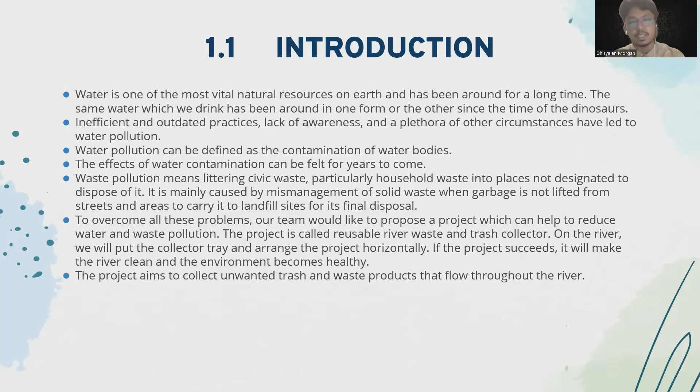Chapter 1, Introduction. Water is one of the most vital natural resources on Earth and has been around the world for a long time. Water pollution can be defined as the contamination of water bodies. Water pollution means littering civic waste, and the contamination of the water can be felt for years, and the effect may come in disease. To overcome all these problems, our team would like to propose a project which can help to reduce water and waste pollution.

Moving on to the research background. Water is the basic need for human beings and any living thing. Earth is covered with 71% of water, and out of that 99.7% is in the ocean, soil, ice caps, and floating in the atmosphere, and only 0.3% is available for human use.

Therefore, an idea was approached to reuse the waste water that flows through the river system. But we face a problem: a lot of solid waste flows into the rivers and blocks the proper flow. Currently, there are manual workers helping to remove the blockage.

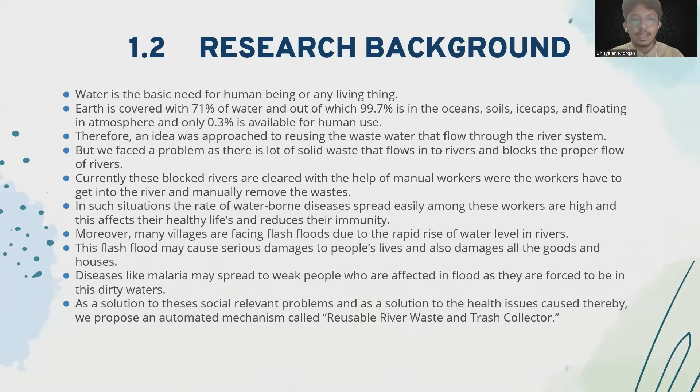Today I'm going to explain the objectives in chapter 1. The first objective is to design the product in a way that mainly suits the purpose of collecting trash that flows in the river, as well as assembling the product with the correct procedure and steps without any obligation.

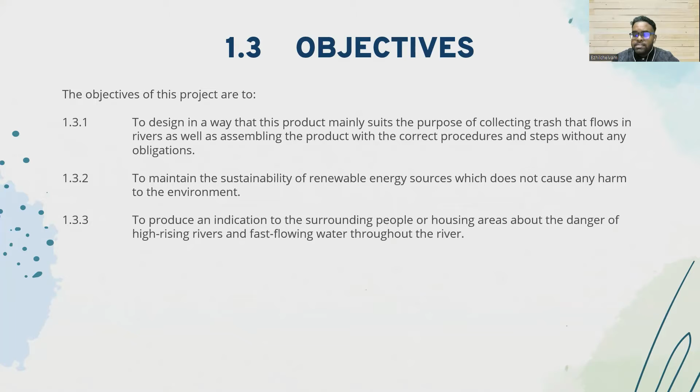The second objective is to maintain the sustainability of renewable energy sources, which does not cause any harm to the environment. The third and final objective is to produce an indication to surrounding people or housing areas about the danger of high rising rivers and fast flowing water throughout the river.

Moving on to the problem statement. The first problem statement is polluted rivers with waste and trash. We can solve this problem using our project, which can collect waste and trash from the river. Hence, the river will be clean.

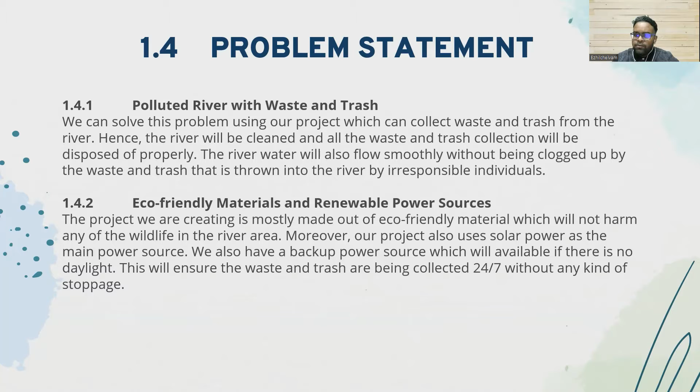The second problem statement is eco-friendly material and renewable power sources. The project we are creating is mostly made out of eco-friendly material, which will not harm any of the wildlife in the river area. Moving on to the third problem statement: cost of the project is high.

The cost of the project we are building is higher because we use mostly eco-friendly materials which are high in quality. And the final problem statement is existing river waste and trash collectors in the market.

The river waste collector already exists in the market. The difference between our project and the existing project in the market is our project can be reused a lot of times and does not have a high maintenance cost.

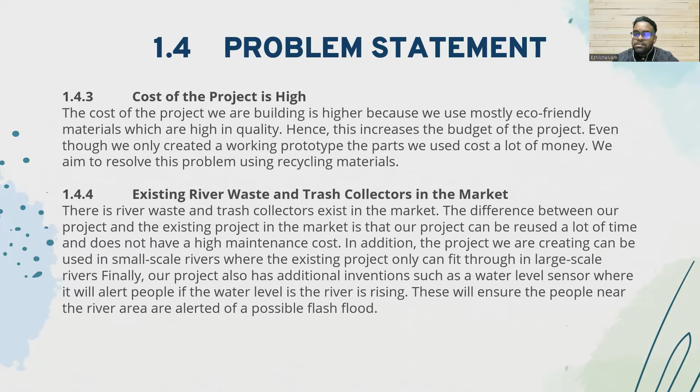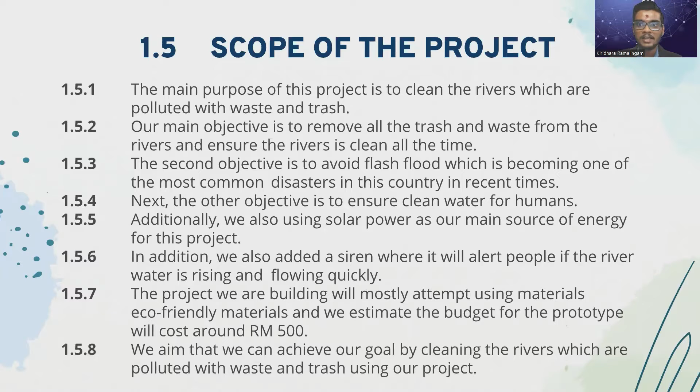The main purpose of this project is to clean the rivers which are polluted with waste and trash. Our main objective is to remove all the trash and waste from the rivers and ensure the river is clean all the time. Next, we are going to look at research question 1.7, which is the significance of research.

This project aims to collect unwanted trash and waste products that flow throughout the river. This product contains a high quality net that filters all kinds of trash, and the collected trash will be automatically thrown into the nearby trash bin, where all the trash will easily slide to the bin when the trash collector is raised at one end.

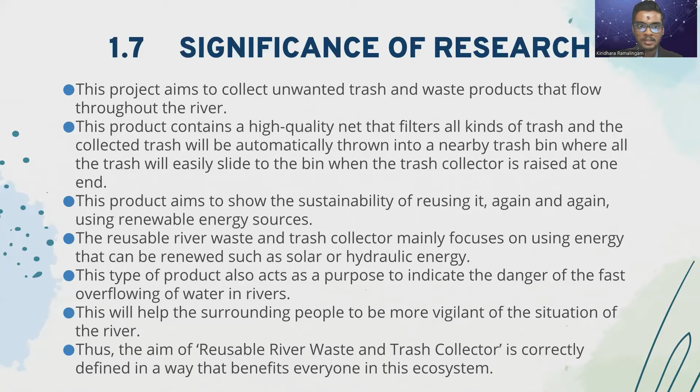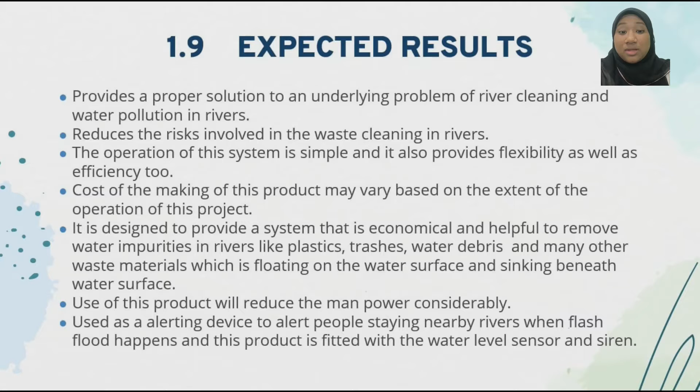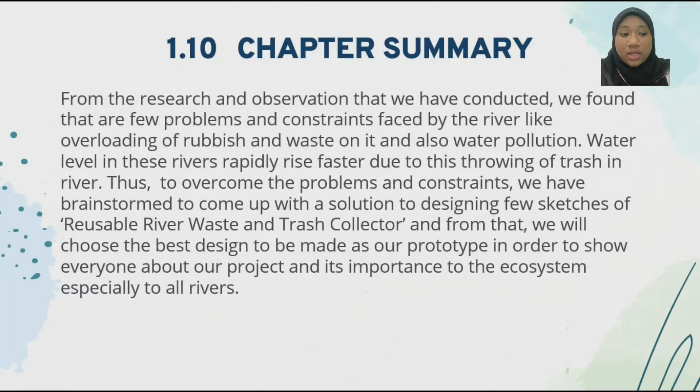Reduce the dangers associated with river garbage cleanup. 1.10 Chapter Summary: based on our study and observations, we discovered that the river has a number of issues and limits, including an overabundance of trash and waste.

Now, let's look at the chapter introduction. After determining the problem statements, objectives, scope, and limitation of the project, a literature review was conducted by group members using books, library materials, and the internet to proceed to the next stage. Moving on, we will look at the concept theory.

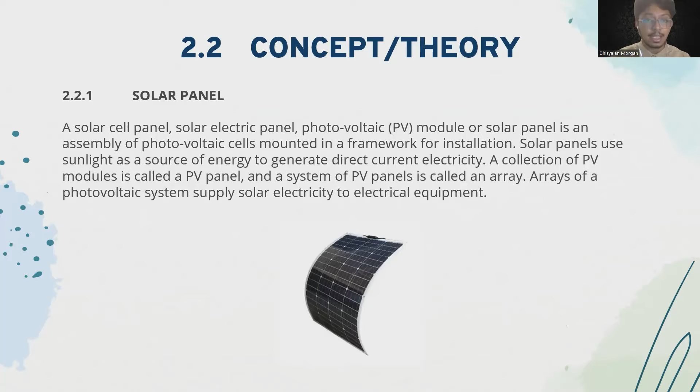First, solar panel. A solar panel is an assembly of photovoltaic cells mounted in a framework for installation.

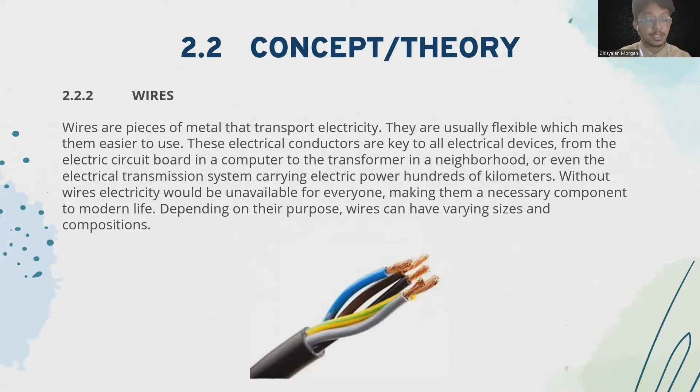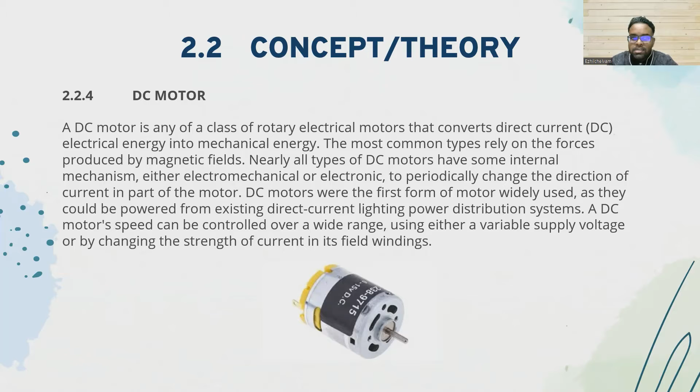Next will be the wires. Wires are pieces of metal that transport electricity. I'm going to talk about concept and theory in chapter 2. First of all, I'm going to talk about DC motor. DC motor is any class of rotary electrical motors that converts direct current electrical energy into mechanical energy.

Glue is a form of thermoplastic adhesive that is commonly sold as solid cylindrical sticks of various diameters, designed to be applied using a hot glue gun.

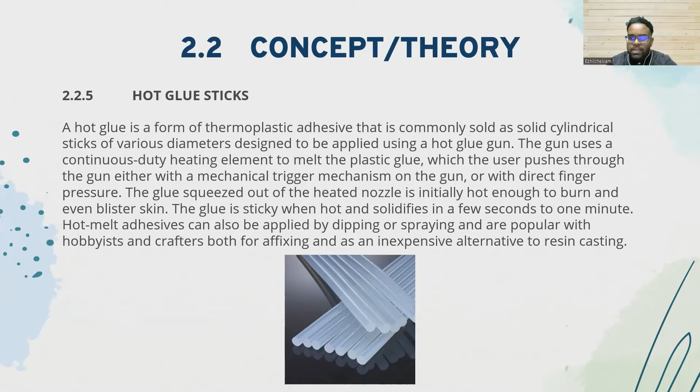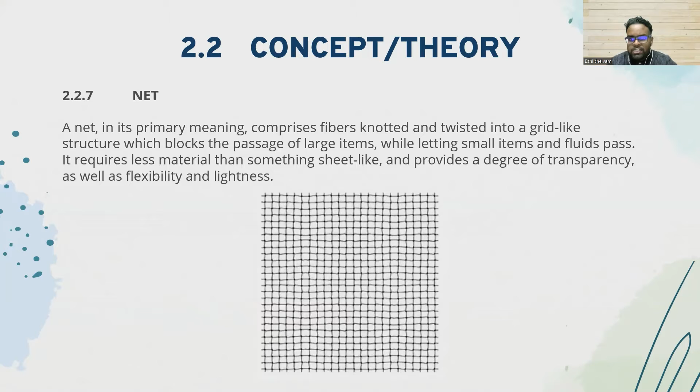Next is a net. In its primary meaning, comprises fibers knotted and twisted into a grid-like structure which block the passage of large items while letting small items and fluid pass.

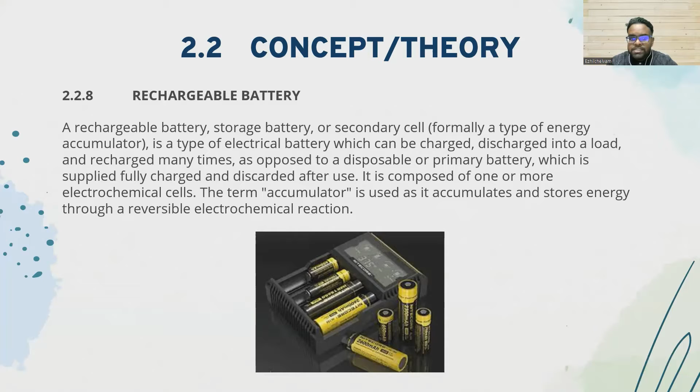And the next one is a rechargeable battery. A rechargeable battery, storage battery, or secondary cell, formally a type of energy accumulator, is a type of electrical battery which can be charged, discharged into a load, and recharged many times, as opposed to a disposable or primary battery which is supplied fully charged and discarded after use.

The next part in concept theory is steel pipes. Steel pipe used as a frame to hold the net tightly.

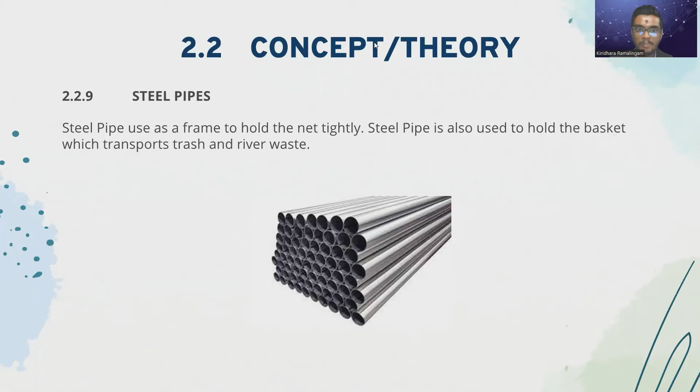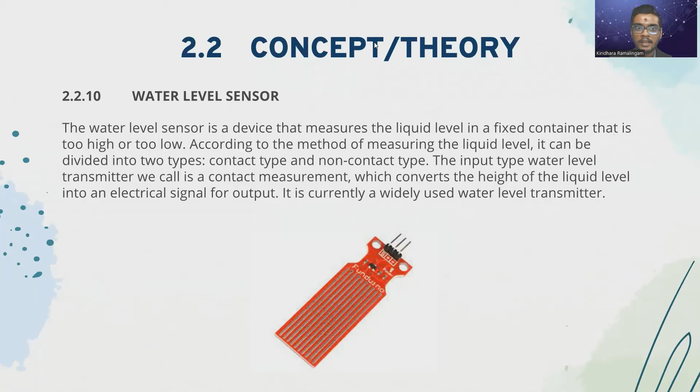Next, we are going to look at the water level sensor. Water level sensor is a device that measures the liquid level in a fixed container that is too high or too low. Siren is a device for emitting a loud wailing sound, especially as a warning or signal, typically consisting of a rotating perforated metal drum through which air or steam is passed under pressure.

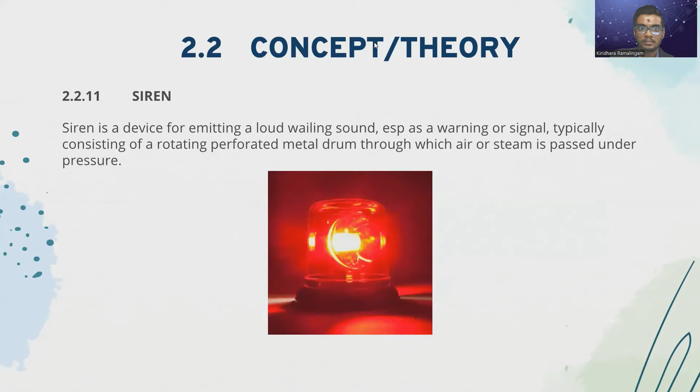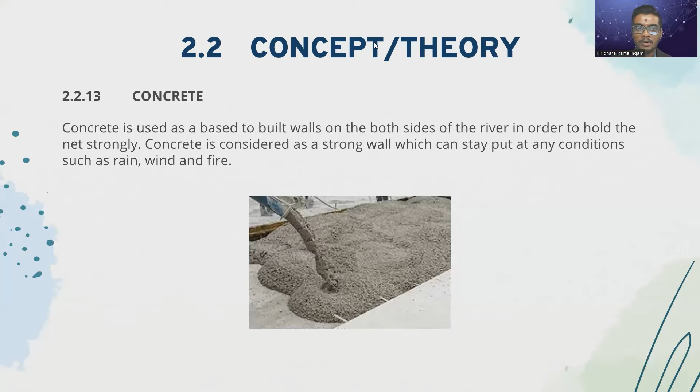Concrete is used as a base to build walls on both sides of the river in order to hold the net strongly. Wire basket used to hold waste and trash.

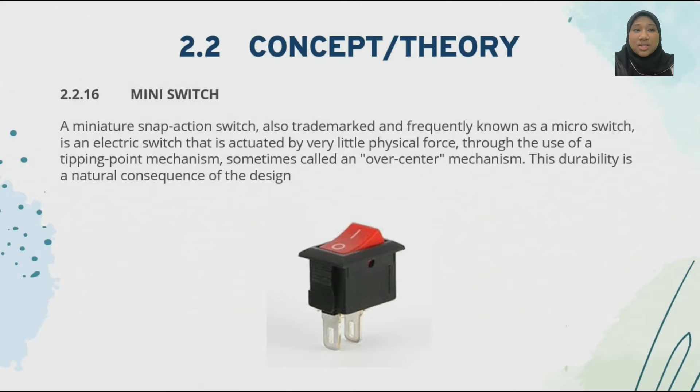Power bank used to provide portable power. Mini switch, an electric switch that is actuated by very little physical force. Belt used as a source of motion.

Previous research. The first vessel deployed in Malaysia back in November 2019. The Interceptor 002 is out of service due to the floods that wreaked havoc in several parts of Malaysia, including Selangor last year.

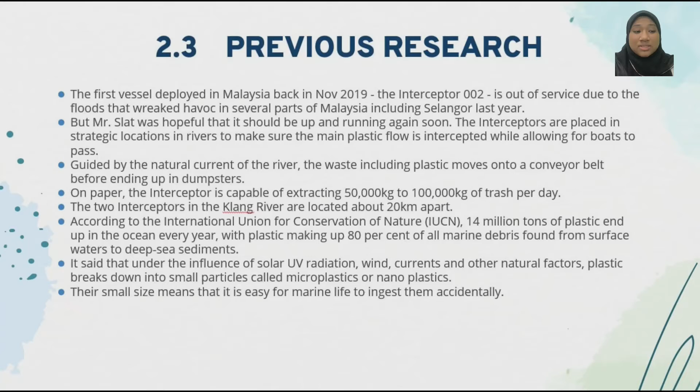Summary. Reusable river waste and trash collector will help to filter rubbish. The solar panel helps to reduce the usage of non-renewable energy.

Moving on to the next chapter, which is chapter 3, methodology. First, let's look at the chapter's introduction.

This chapter will teach us how to collect various forms of data in order to create a reusable river waste and trash collector. This chapter outlines the many stages of research, which primarily contains public opinion polls, questionnaires related to our topic. Moving on to the project design.

Designs are required for the development of the project, reusable river waste and trash collector. This must be completed in order to develop a concept of ideas for the project.

Before designing or making designs for this project, data analysis is required, as they are the result of the morphological chart. This project will be done to evaluate the performance of the project as well.

Now I'm going to talk about the data analysis method. The survey we conducted had 24 responses. The first question we asked is: have you seen a river covered with waste and trash? 95.8% of them said yes, and the rest said no.

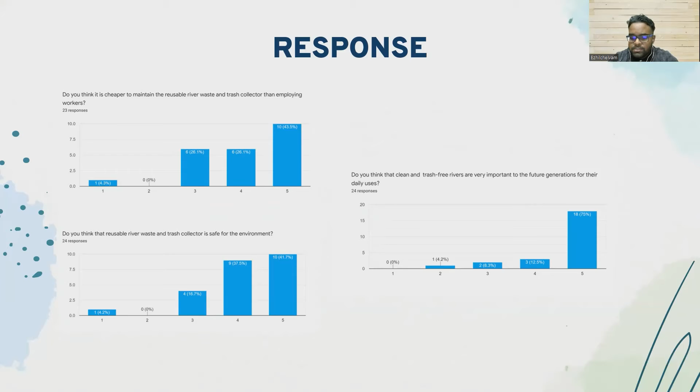In 3.2 of chapter 3, we are going to discuss the components of the project. For the reusable river waste and trash collector project, some components are needed for the process of fabrication.

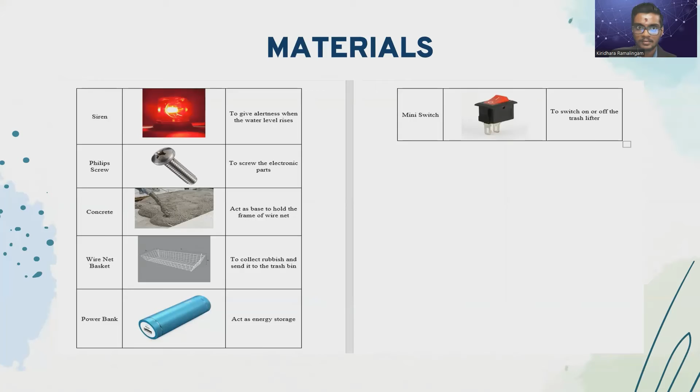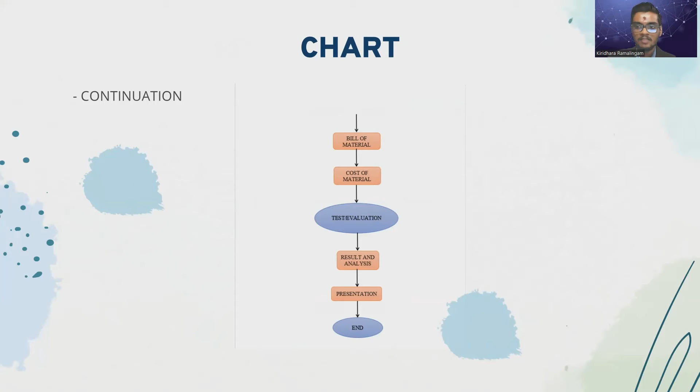After creating the design, we proceed to the literature review methodology, then proceed to compare and select parts of the project, where we must do the bill of materials and cost of materials. After that, testing or evaluation of the project is done, where we conduct the result and analysis and present our presentation. After the presentation, our project 1 comes to an end.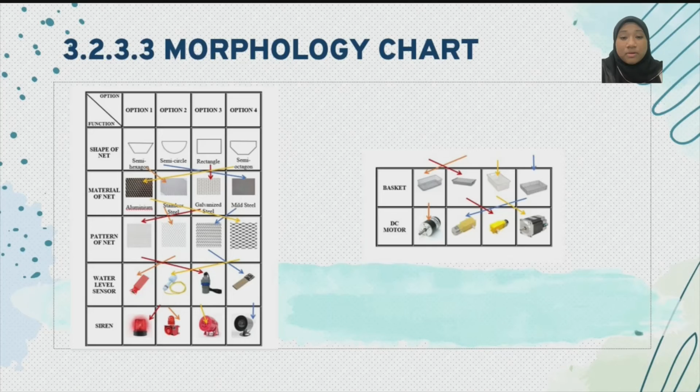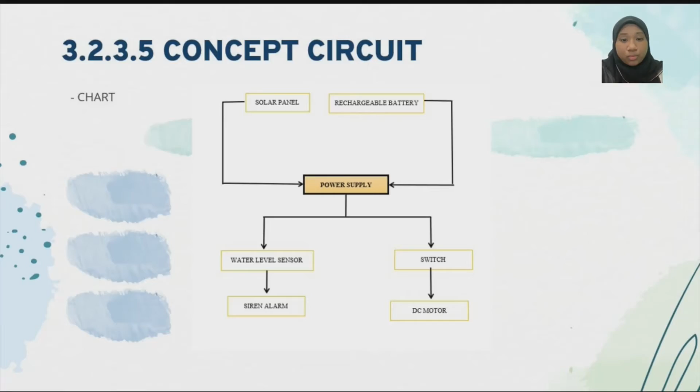Concept circuit: the solar panel and rechargeable battery connect to the power supply. The power supply divides to the water level sensor and switch. The water level sensor connects to the siren alarm, and the switch connects to the DC motor. We build 2 tunnels and put the net on the tunnel. The net will open and put the trash in the basket, supported by the DC motor. The water level sensor connects with the siren, and if the water level goes over the limit, the siren will make a noise.

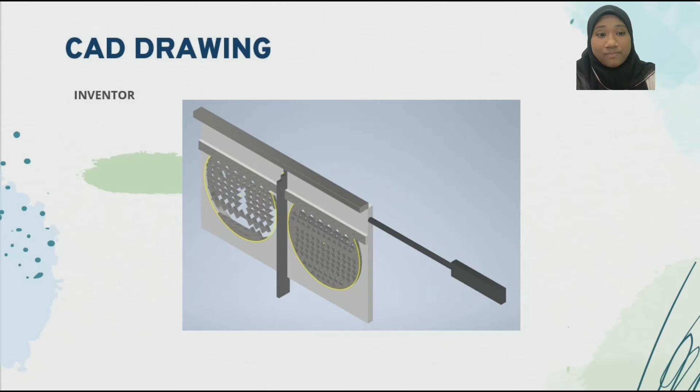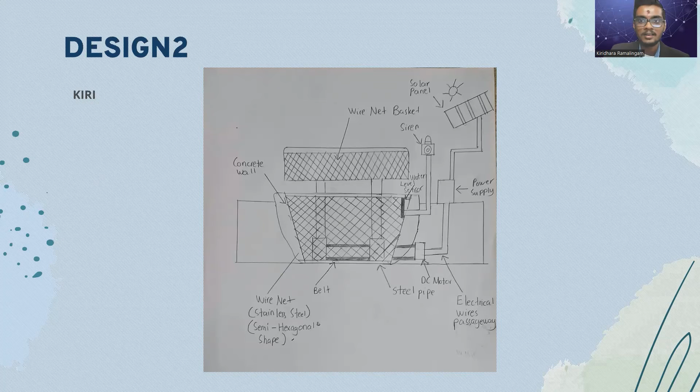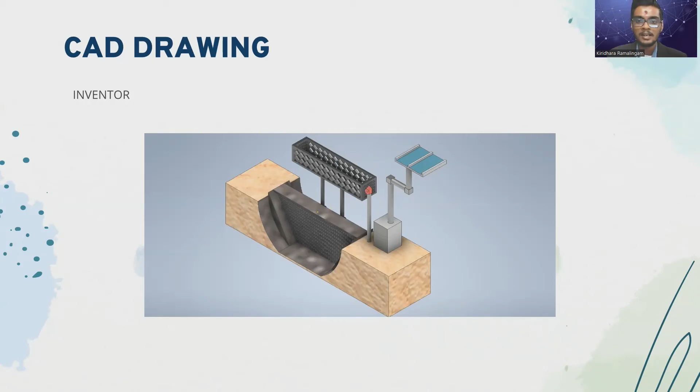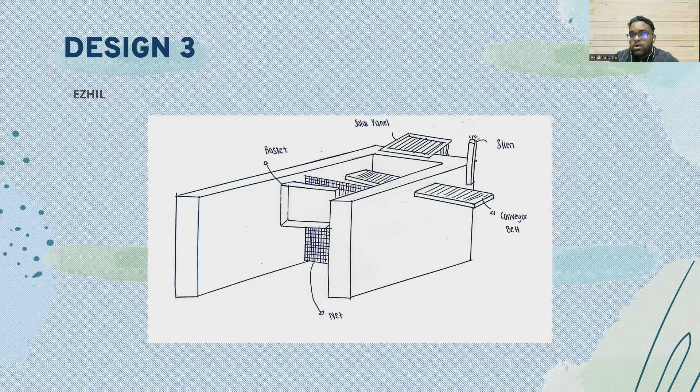Now I'm going to explain how my design works. When the trash flows through my design, the basket will collect all the trash and waste and will rotate 180 degrees and throw the rubbish and waste into the conveyor belt.

Then the conveyor belt will rotate and carry out all the rubbish or waste from my project to the side of the project. And then the waste and trash can be collected easily using a worker's help or any other kind of invention.

My project also has a siren which will alert if there is a high rising water or fast flowing water in the river.

My project also works on solar panel, where it will work as efficiently as using electrical current. It also has a rechargeable battery fixed to the back of it. If there is no daylight, the rechargeable battery will start working and take over all the functions of my project.

I also fixed a net between the basket and the conveyor belt so that the rubbish wouldn't flow through it easily. I think that is the design.

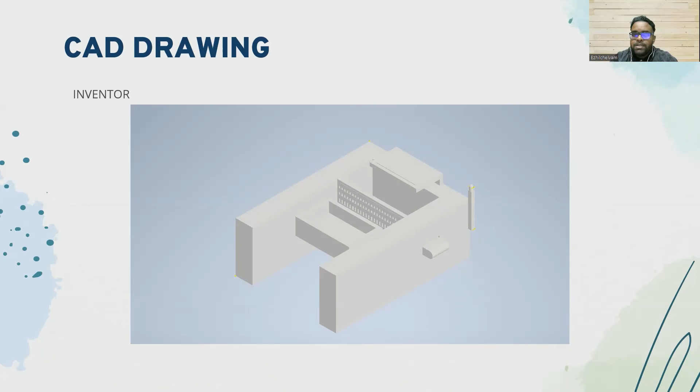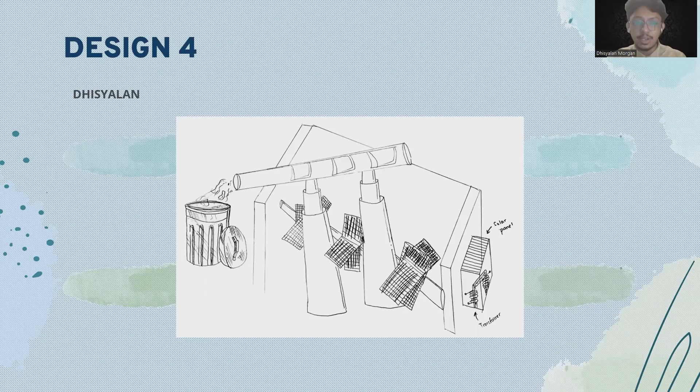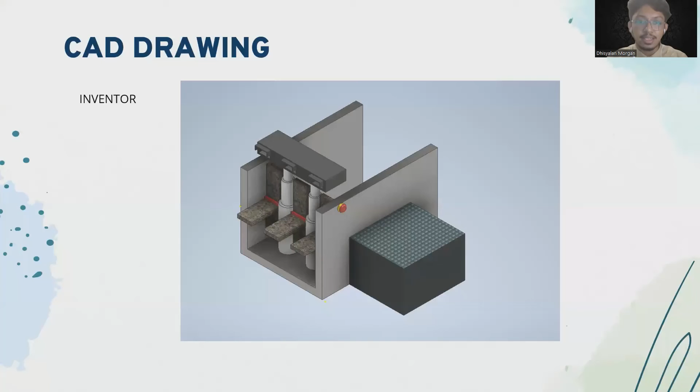Now let's look at the CAD drawing that I have drawn using Inventor. Basically, it will look like this.

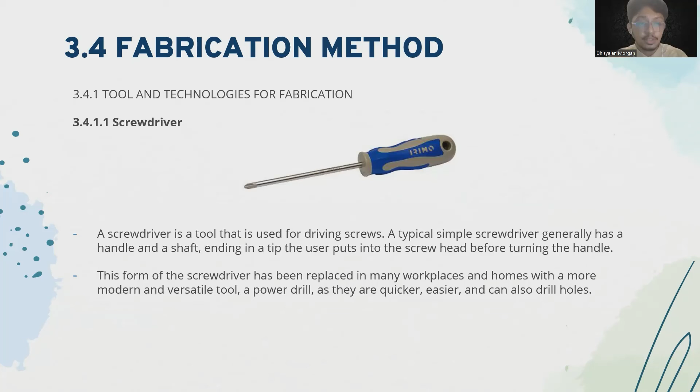Moving on to the fabrication method, tools and technologies for fabrication. First of all, it is the screwdriver. A screwdriver is a tool that is used for driving screws.

Moving on, that is the welding. Welding is a fabrication or sculptural process that joins materials, usually metals or thermoplastics by using high heat to melt the parts together and allowing them to cool, causing fusion.

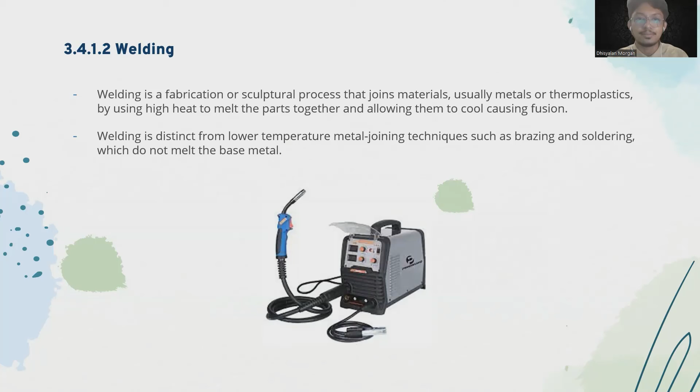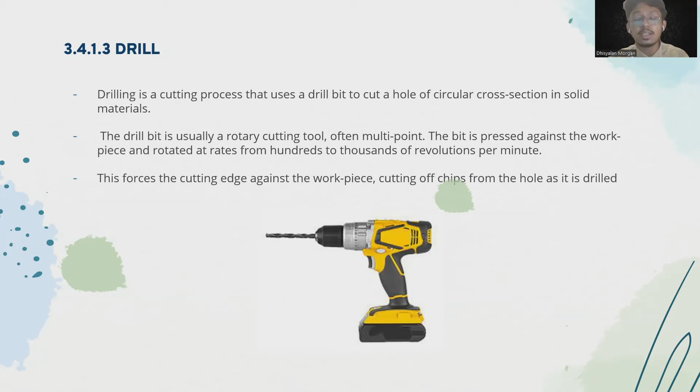Next will be the drill. Drilling is a cutting process that uses a drill bit to cut a hole of circular cross-section in solid materials.

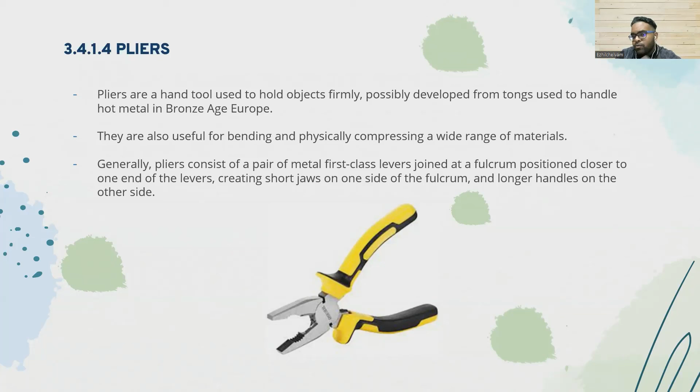The next tool for fabrication method is a plier. Pliers are hand tools used to hold objects firmly. This will come in handy in my project because this will be useful for bending and physically compressing a wide range of material.

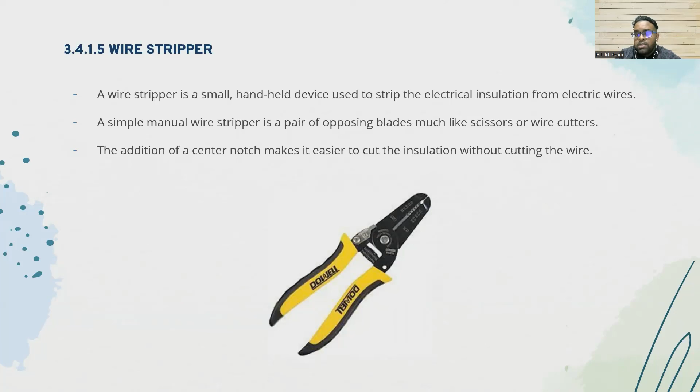Moving on to a wire stripper. A wire stripper is a small handheld device used to strip the electrical insulation from electrical wires. This will help in my project to strip the electrical wires that are used to connect with solar panel, rechargeable battery, or even the DC motor.

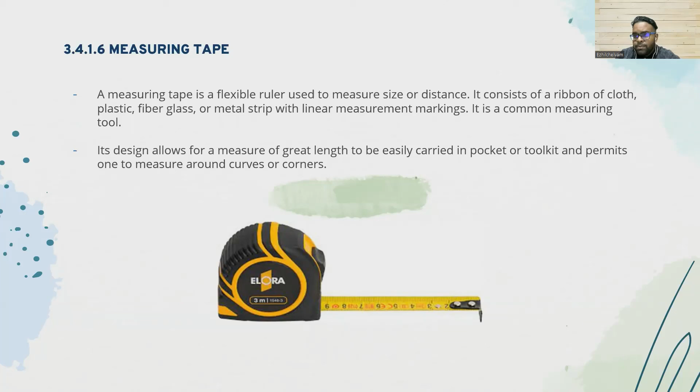The next one is a measuring tape. A measuring tape is a flexible ruler used to measure size or distance. It consists of a ribbon of cloth, plastic fiberglass, or metal strip with linear measurement markings. It is a common measuring tool. I will use this measuring tape to measure the length of steel pipes or the length of metal sheets that I need for my project.

The next one is the Allen key. An Allen key is a simple driver for bolts or screws with internal hexagonal recesses, also known as sockets. I will use this Allen key in my project to tie the basket to the project.

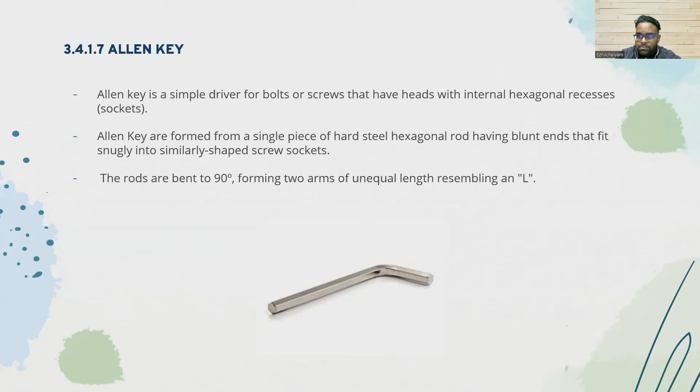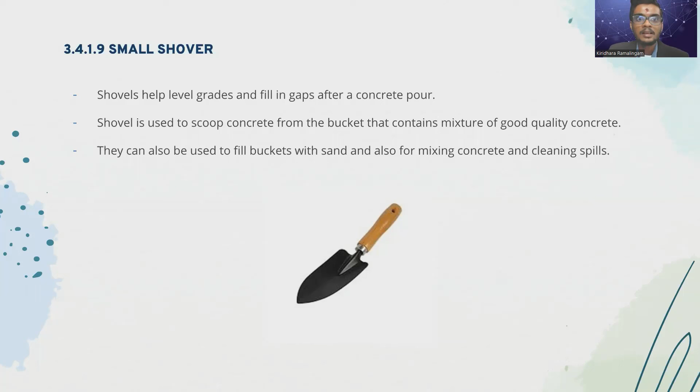The next part or material which I am going to present in the fabrication process of the project is small shovel. Shovels help level grades and fill in gaps after a concrete pour.

Next is screeds. Screeds are long, straight, stiff tubing or boards used to smooth and roughly level wet concrete shortly after it is poured.

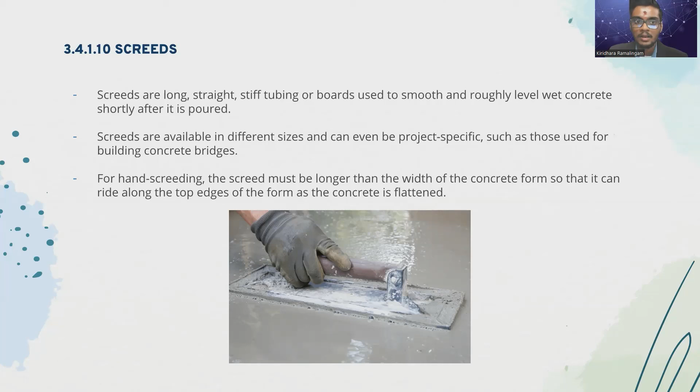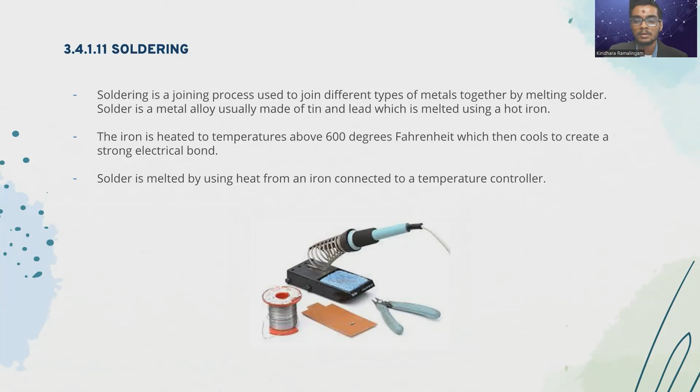Next is soldering. Soldering is a joining process used to join different types of metal together by melting solder. Solder is a metal alloy usually made of tin and lead which is melted using a hot iron. This soldering process is used to solder the wire net to the steel pipes and also to solder the electronic pipes in our project.

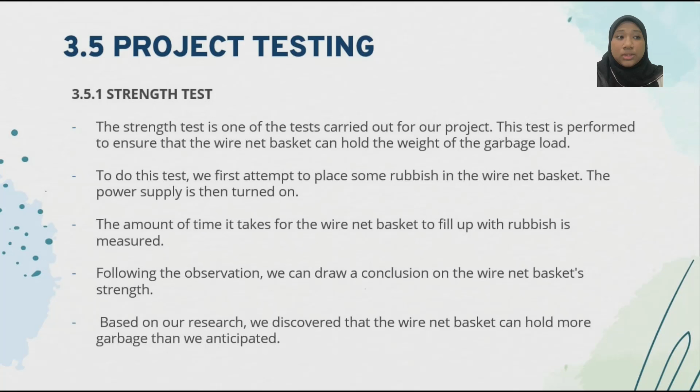Strength test to ensure that the wire net basket can hold the weight of the garbage load. Estimated cost: the amount will be shown on the table with the list of equipment.

Summary: data collection, project design, material selection, cost of materials, tools, machines, fabrication process, and project testing are the sections of this chapter. Thank you for lending us your ear.